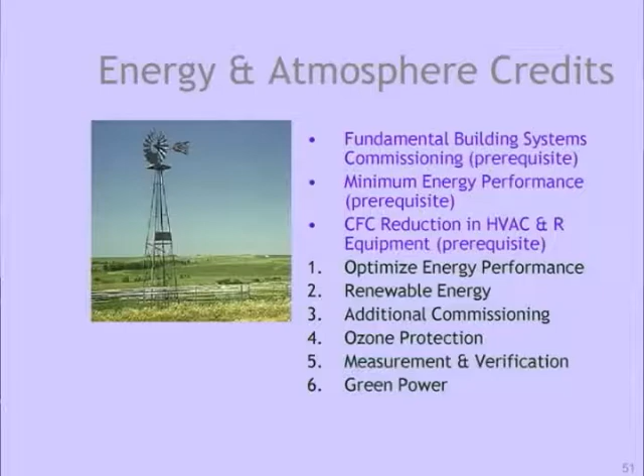So this next category is energy and atmosphere credits. There was a movement in the United States early on when we had high oil costs to do energy conservation, and a lot of those people never gave up the fight to make things more energy efficient. They've rolled some of their efforts into LEED, which is why there's a huge concentration of credits under energy and atmosphere. It's felt that in general our energy production is fossil fuel based, and it is causing climate change in a very negative way throughout the world. We need to do as many things as we can to make our energy go further and reduce emissions from energy production.

So there are 3 different prerequisites within energy and atmosphere, and each one of those prerequisites also has points related to it.

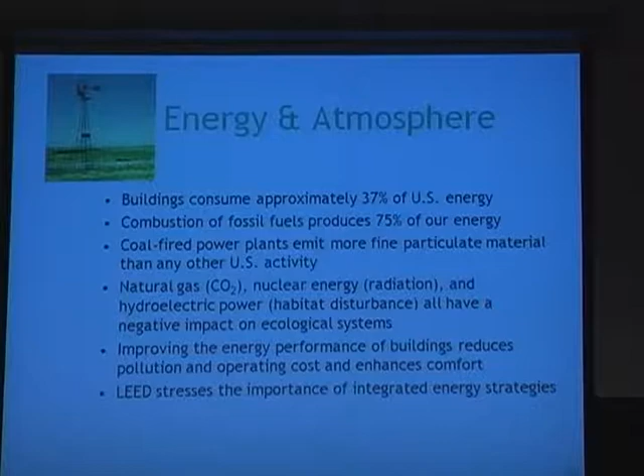We have coal-burning power plants for the most part in the United States, and that's making a whole lot of contamination of our waterways—mercury, asthma, and all kinds of different pollution effects happening. I'm hoping I don't have to explain too much about the nuclear power industry, but we've had a tremendous amount of lobbying by the nuclear power industry throughout the world, trying to build nuclear power plants and saying it's the most efficient and least polluting system there is.

But I challenge you to talk to the people of Japan right now about the pollution effects. We just have not figured out a really safe way to minimize radiation pollution and the effects when things go wrong with nuclear power plants. So I think we need to rethink energy use across the board and come up with better solutions than using all of these methods that are ruining the quality of life for the earth.

So with LEED, we're trying to get you to think in an integrated team approach to thinking about the energy use in a building. The first place to start is to minimize the need for energy. I'll go into that in a minute.

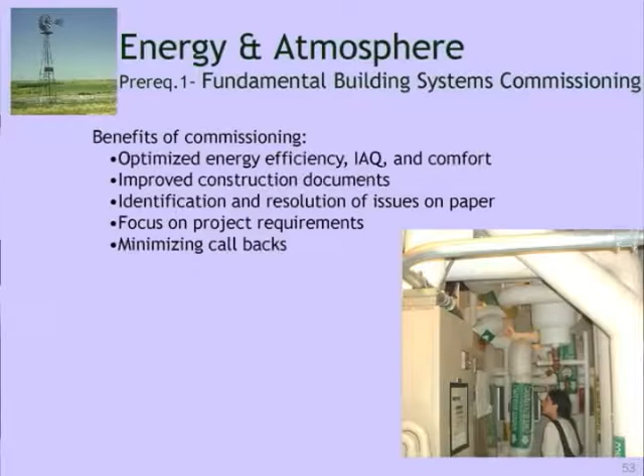The first prerequisite within the energy category has to do with building systems commissioning. I don't know if it's the case in Mexico, but in the United States, a long time ago, we used to have engineers work on projects all the way through design and construction. In our never-ending need to reduce fees and reduce the cost of construction, we kept eliminating little portions of engineers' and architects' work, so they don't always work on all parts of the project. So the engineers would design something quite good, but they weren't always around to see if it got built the way they designed it, or if it functioned the way it was supposed to.

So LEED started using this concept called commissioning. Commissioning is a term that was actually developed by the Navy. When they would build a ship, they wanted to make sure that sailors didn't sink, so they would send the ship out into the ocean to see if it worked, if it floated, and if it could bring people back without drowning them. That was called commissioning. So we do that with buildings—before we put the occupants in them, we want to make sure that all the building systems are built the way they were designed and that they're functioning properly.

Many times we just leave that step out to see if everything's working properly. And we know buildings are going to get commissioned one way or the other—it's either by the occupants putting a piece of tape over their vent, or a newspaper over their window because they're too hot, something like that. It's going to get commissioned. So it might as well be at the beginning of the project before people get into it.

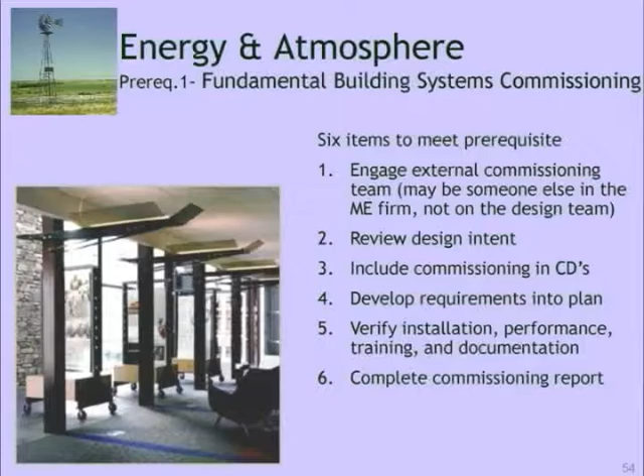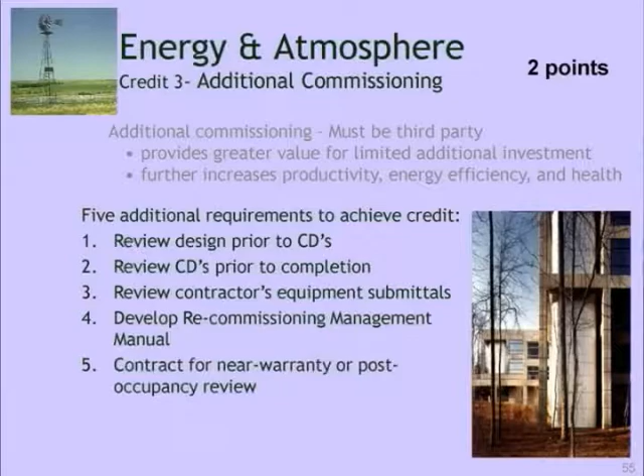So that's a prerequisite. You don't get any points for that, but if you'd like to get points, you can go further and make sure this commissioning agent is involved in the design process so they intimately know what is expected. They not only do the commissioning, but train the people who will work in the building on how the system works. They write a manual, and come back a year later to recommission, making sure it's working the way it was supposed to. So there's additional work for this same person to come back and review.

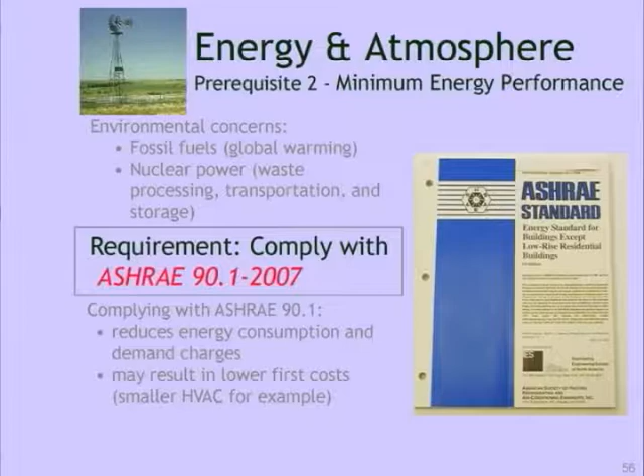The second prerequisite is minimum energy performance. We have this organization in the United States, and it's actually international, because many countries haven't gotten around to having their own professional engineering organizations to create standards for comfort, heating and cooling. For LEED, we rely on this engineering organization called ASHRAE, who developed standards for heating and cooling, and they have a standard for energy performance of a building called ASHRAE 90.1. You must meet the requirements of ASHRAE 90.1 to get the prerequisite.

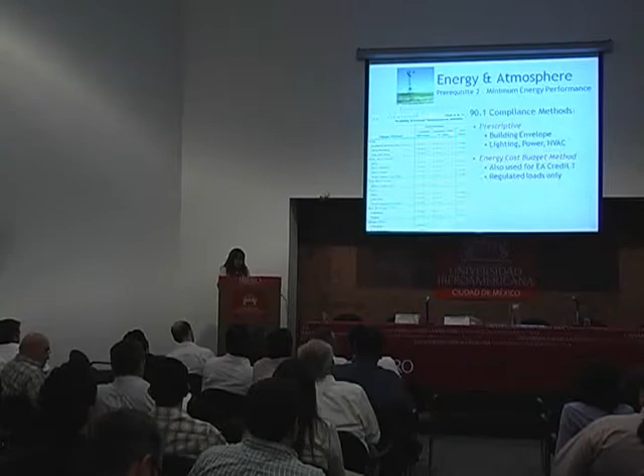There are two different ways to do this. Either follow a checklist of different items you've put in, like how much insulation, the square footage of windows versus walls, what the efficiency of your equipment is, that kind of thing - that's the prescriptive method. And then there's the energy cost budget method, which I'm not going to go into.

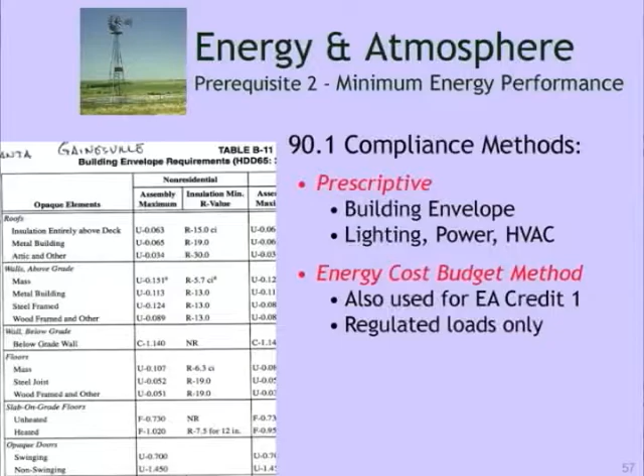There's another concept called energy modeling, where you have software that designs a theoretical building, and then you compare that theoretical building, which follows building code or in this case ASHRAE. Many cities in the United States have building codes that require energy codes. So it's what you can do legally versus what your new design would do, and how much better performing your new design is. There's at least 50 different software programs you can use to help demonstrate compliance to this ASHRAE standard.

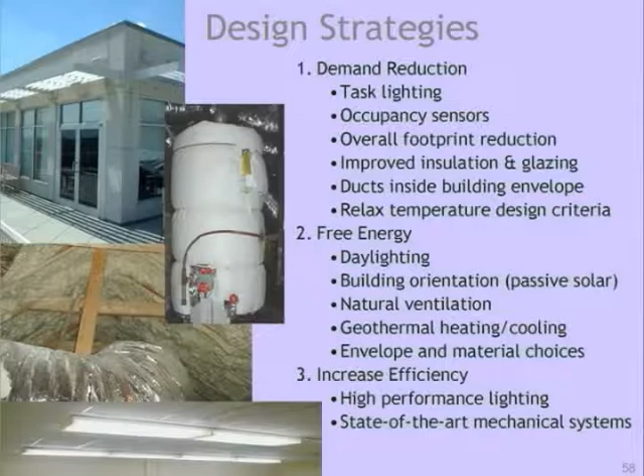What you would want to consider - I think number two should be the first thing you consider - free energy. Can we make this space comfortable? Can you read and do all your functions with natural light instead of having lights on all the time? Because we know people just don't take responsibility to turn lights off even when they don't need them, they just don't take that initiative. So could we get by with natural ventilation?

Here in Mexico City, you've got a pretty temperate place. You have a comfortable situation a lot of the year where you don't really need assistance with heating and cooling, so can you take advantage of that? Can you build a building to shade you in the summer and keep you warm in the winter without mechanical assistance? There are different ways - passive solar design, different ways to orient your building on your site - to make use of free energy.

Then any equipment and any building envelope you have, you'd want to make it so you don't have to demand electricity to make the place function. And if you do have to put equipment in, make it high efficiency equipment. There's a variety of options there - you can either buy the cheapest, right-off-the-shelf thing, or you can look further and find something a lot more efficient. It's up to you, it's out there.

The third prerequisite has to do with the gases used in heating, cooling, and refrigeration devices. When I first started coming here, I know Mexico still allowed CFCs - didn't you recently pass a law that prohibits CFC use? Anybody? No engineers in here? Maybe you didn't, maybe you still allow CFCs - you're one of the few countries in the world that does. But that's unfortunate, because CFCs are known to directly affect the ozone layers of the world.

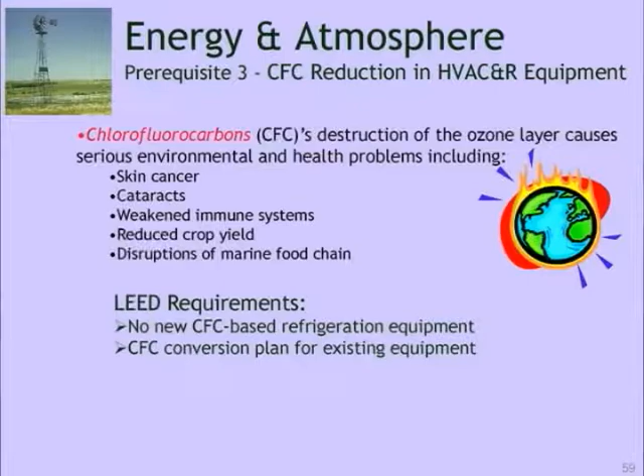So for the prerequisite, to do a LEED project, you cannot have CFCs in refrigeration or cooling, so air conditioning - either in refrigerators or air conditioners. You have to build a building without that, and there are items on the market that help you with that. There's a credit that goes a step further than just meeting that requirement.

CFCs are chlorofluorocarbons and HCFCs are hydrochlorofluorocarbons. All of these gases are used for propellants and keeping things cool. There are a number of different propellants now that can replace these ozone depleting ones. LEED prohibits the use of CFCs and gives you points for avoiding HCFCs.

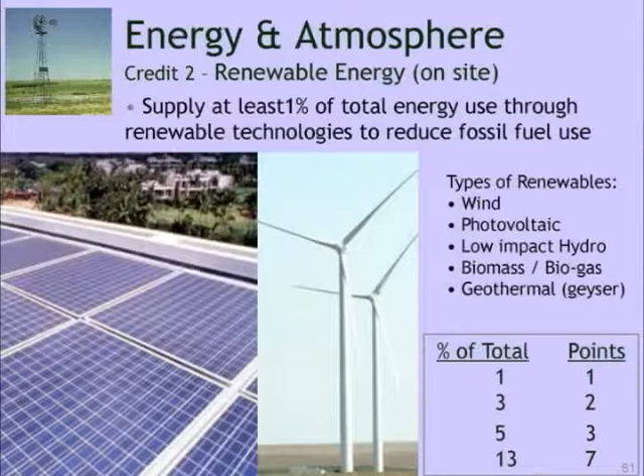These wind turbines in the middle are probably not so on-site friendly. They need to be a little smaller to be useful, but I know there are certain portions of Mexico that are wind tunnels. You can look at wind maps and know where wind might be likely, and that's where you'd use on-site wind generation.

If you don't have that, I know Mexico has plenty of sun, so another option might be photovoltaics or solar panels. Another place, if you have high mountain streams with enough volume, you might use small turbine hydroelectricity, running your building off stream power without interfering with the natural flow of the stream. I saw that in Ireland, a fairly flat country, but they had places where streams coming off mountains would power small villages and farms.

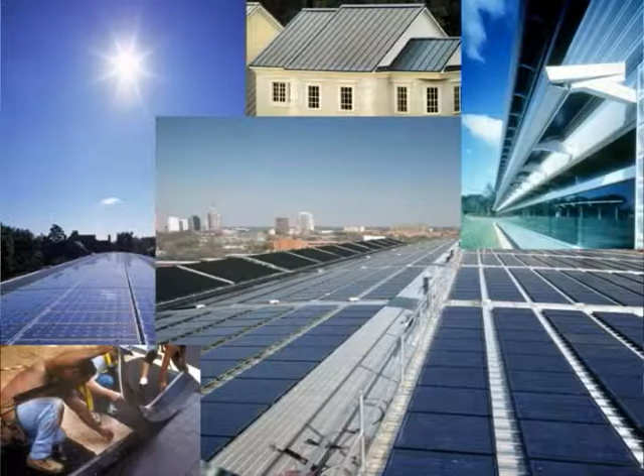In Europe, it's becoming very common to see building integrated photovoltaics, where they're part of the building skin or roof system, fully integrated instead of just applied to the roof or the ground off the building.

Measurement and verification is in here because a lot of times we build things and then don't pay attention to whether they're really functioning as designed five years down the road. This involves building in meters or computers within your building to track energy use over time and indicate if something's going wrong.

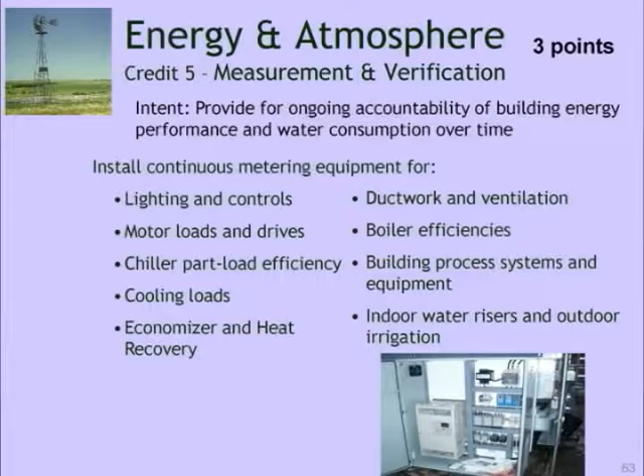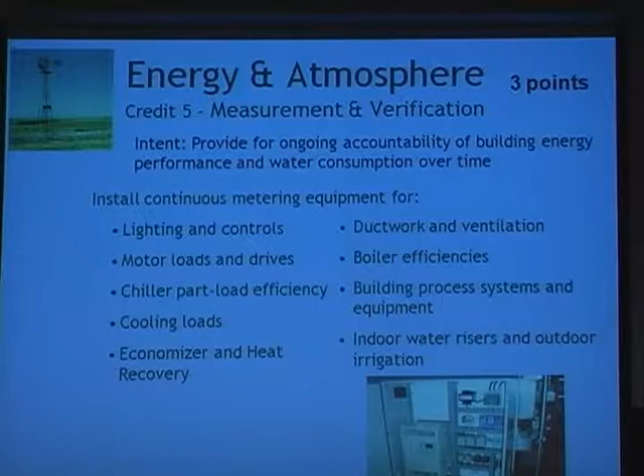So if you planned a certain amount of watts for your lighting, and two years down the road you're suddenly using all sorts of electricity for lighting, this measurement and verification protocol will help you identify what might be happening and what corrective measures to take. Some of this equipment can be pretty costly for a small building, but for a large building it can really help you save money by identifying where electricity is being used and where it's being wasted.

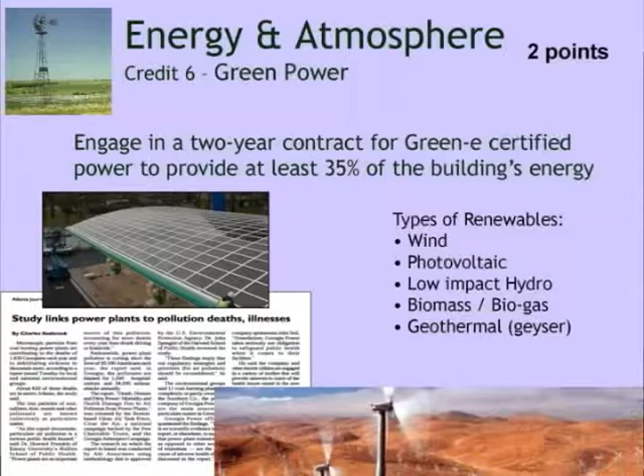So you no longer have to go somewhere else in the world to purchase green power. You can either purchase power to run your building, or buy something called a renewable energy credit, meaning you're not using it directly in your building, but offsetting your electricity by helping promote a wind generation plant somewhere else. It's kind of like carbon trading. There are two ways to get this credit: directly buying power from a renewable energy source, or buying the renewable energy credit.

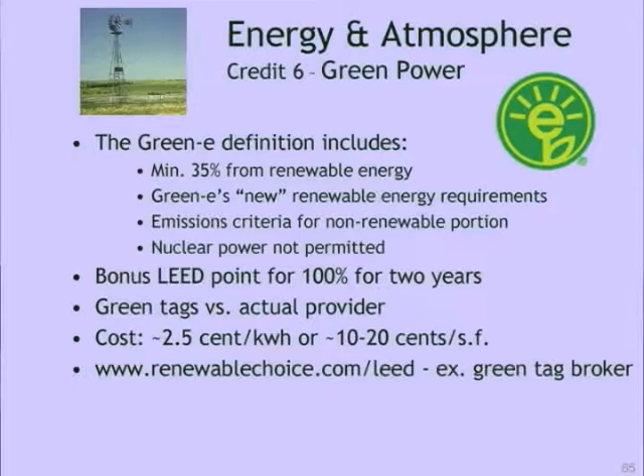Way too much information, but I think renewablechoice.com will help you find a broker, even in Mexico, if you don't already know of brokers for green power. So with green power, there are two options: you either supply your own power on-site, or you offset that power and get it from the grid or purchase the renewable energy credit.

So with these energy and atmosphere credits, there were a whopping 35 points you could get. There's a lot more emphasis here than, say, water or sites.

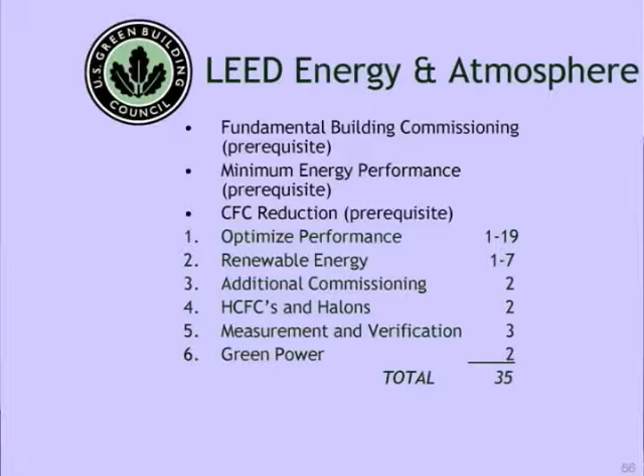The next category is materials and resources. This is what a lot of architects focus on because it's what they do, specifying materials. There are points here about minimizing waste in the manufacture of materials, making wise material choices, and using materials that don't use up a lot of embodied energy. Are you familiar with that term?

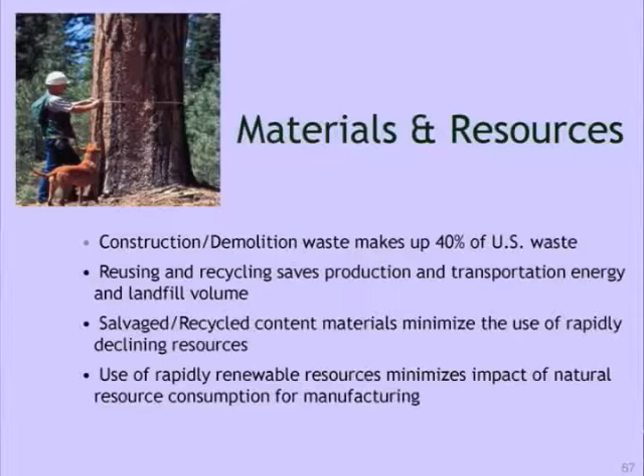It's not just the energy that it takes to make something function, it's all the energy and natural resources it takes to produce and use the material over time. So we're trying to look at embodied energy in materials and reduce that amount. In future versions of LEED, there's going to be a much stronger concentration on environmental footprint or embodied energy of material use.

We're working with ISO, the International Standards Organization, to come up with embodied energy standards and material standards in general. It's been quite a long road to try to get this international standard in place.

Everyone has their own measurement technique. Do we measure how far the workers have to drive to the mine, and how far the mine is from the factory? Nobody knows exactly where to measure from or where to start in measuring environmental responsibility. So we're coming up with international standards where we can all agree on the stopping points and measuring points for environmental responsibility of material production. So stay tuned, that's going to be the next new thing in LEED.

Now, you have a legendary landfill here in Mexico City. I understand it's huge. At some point I'd like to go see it someday. But anyway...

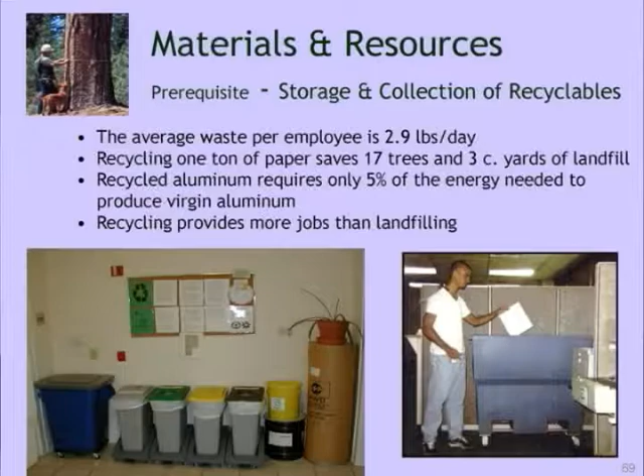We're trying to encourage people to recycle within their business and to sort their materials in their business, so it makes it easier to separate and send those off to places that can reuse them.

I understand there's actually a neighborhood here in Mexico City that started a recycling system, and within 4 days they had diverted 4 tons of garbage from the landfill. That's pretty significant for one little neighborhood, and they're trying to make that happen all over Mexico City now.

But it's going to take source separation, so you have, I think they do it here in this university, paper, cardboard, plastic, aluminum, that kind of thing. So this is a prerequisite with LEED, that you have to make this effort to recycle within your site. I know this used to be a difficult thing for buildings in Mexico City, but it's not anymore. I don't think you have any excuses anymore. You can do this now.

So this will help with the waste management issue that we all face.

The first credit is building reuse. And in my mind, the greenest building is one we don't build. Let's reuse what we have. I'm not sure what adaptive reuse we can make of pyramids, but somebody's probably thought of it before. We can figure out a way to reuse this.

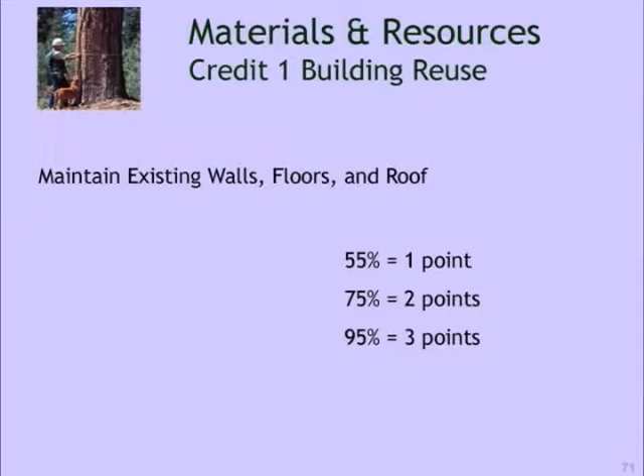The way we measure this is by physically measuring the walls, the roof, and the floor. So that means you don't have to reuse all of the building. You can maybe knock out one of the walls and add on to it or something, but reuse as much of the existing building as possible.

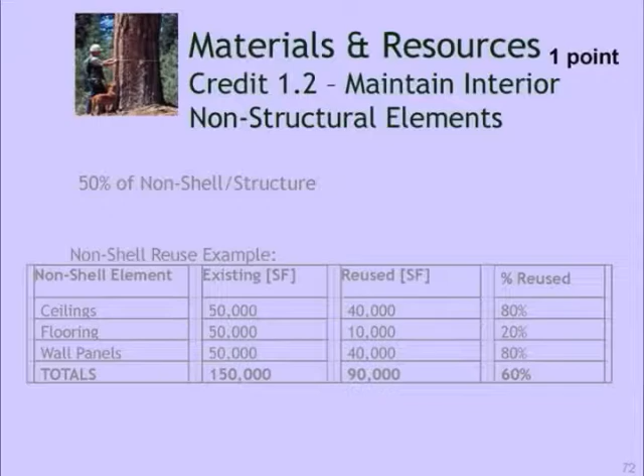There's a second point for reusing interior sections of a building. So maybe you're using the envelope of a building and not using most of it inside, but if you take some of the partition walls, maybe there was an acoustical ceiling you could use, or some of the flooring you can reuse, that can help you get this extra point for maintaining interior non-structural elements.

During construction, we know a lot of construction waste goes to the landfill. So again, we're starting to look for ways to divert materials, to reuse construction materials and use them more mindfully, even in other building projects or for someone else's use.

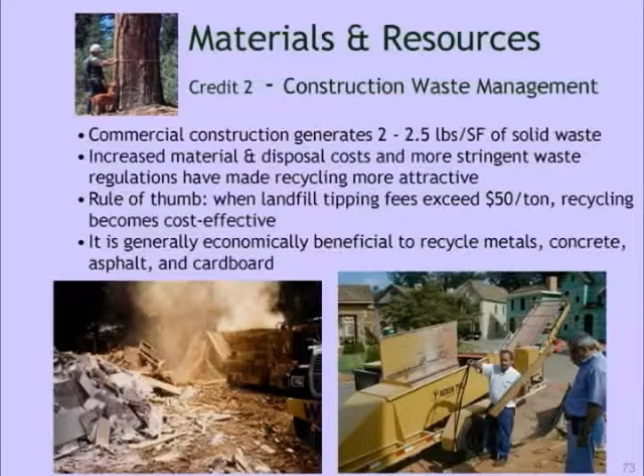For instance, on one of my projects we were building a new airport, and we took up all of the concrete and ground it back up and put it back down. I'll back up a little bit. We had to pull up the concrete because there was toxic waste buried under it, so we had to get to the toxic waste, pull it up, remediate it, and then put the concrete back down, which was something we hadn't planned. We thought, oh good, we have all this concrete, we can land planes on it. But anyway, we ground up all of that concrete.

We used all of that again in a new concrete mix. So going the extra mile to think up ways to reuse the materials is going to help with your landfill size, as well as help with your cost to haul away materials. Maybe you can find a home for something really close by. The metals, some people might want to come and claim. Some people might want to grind up the concrete and take the cardboard away. There are markets for these things.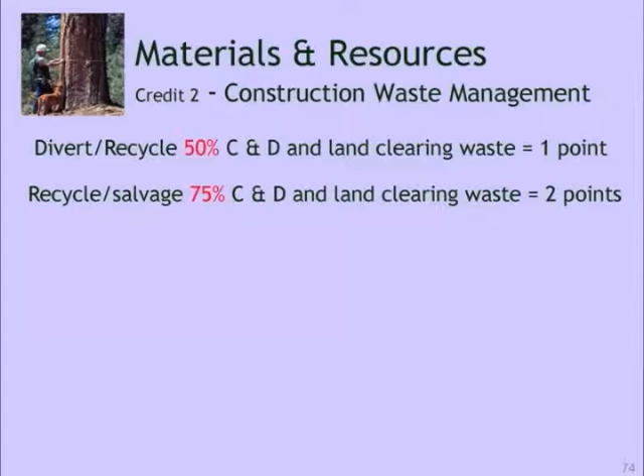So you get up to 2 points for construction waste management, for diverting up to 75% of your materials. If you divert more, you can get a 3rd point. By many of these credits, if you exceed the thresholds, you get an exemplary performance credit. So you could get an exemplary performance credit for this.

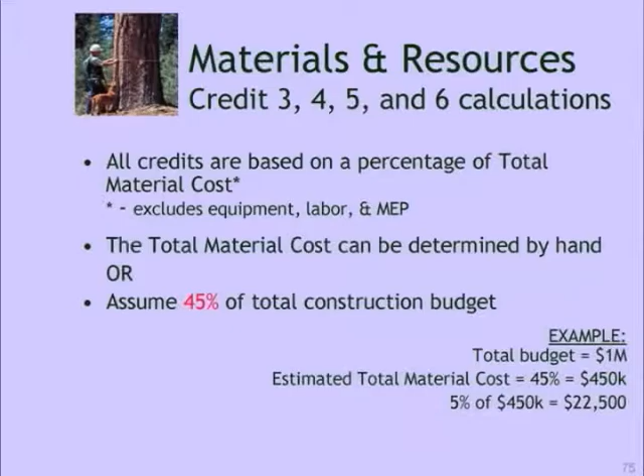These materials credits, it was really hard. This was many, many meetings worth of trying to figure out how responsible a building is with materials. And the only way we could figure it out, because it was difficult to compare one building's materials to another building's materials and say which one was better. One building might be huge and the other might be little, and what if the little building used some really horrible materials?

So what we decided was to measure this by percent of the cost of the materials. So the total cost for the building materials, this doesn't include labor. We have to get that figure, which has been difficult, I gotta say, to get the general contractor to give us a just materials figure, because many contractors, when they're bidding on, say, the wall system, they bid on everything - the paint, the wall, the labor all together - and to try to get them to break that out has been a bit of a challenge with LEED.

But we've been able to do it on projects to try to get this more fair way of measuring the responsibility of materials. So these next several credits are a monetary achievement. So the more of your construction budget that has these attributes, the better.

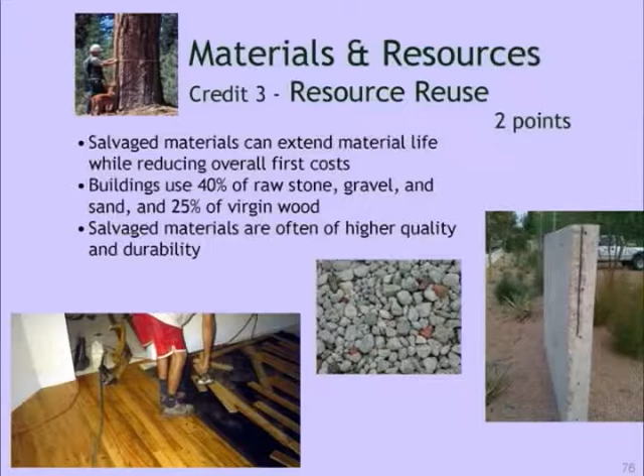So we got them to cut up the parking lot into some squares. We tilted those up and put them, instead of that we use those for these walls. A friend of mine calls this urbanite - so it's urban refuse being used again and stretching out its life. The picture in the middle is ground up concrete and ground up aggregate to be used back into, or you can just reuse it as gravel on your site. I don't need to tell you more about that.

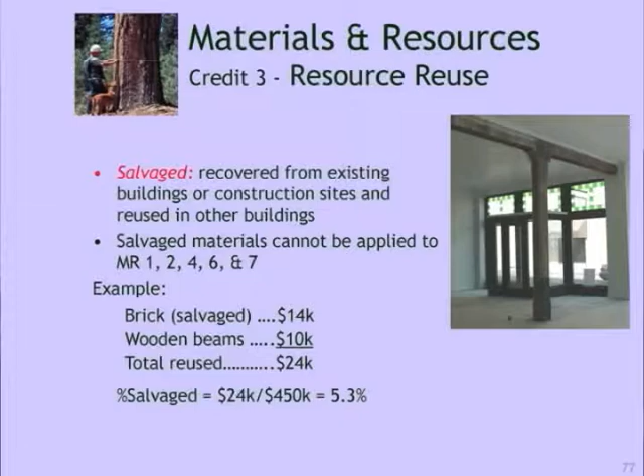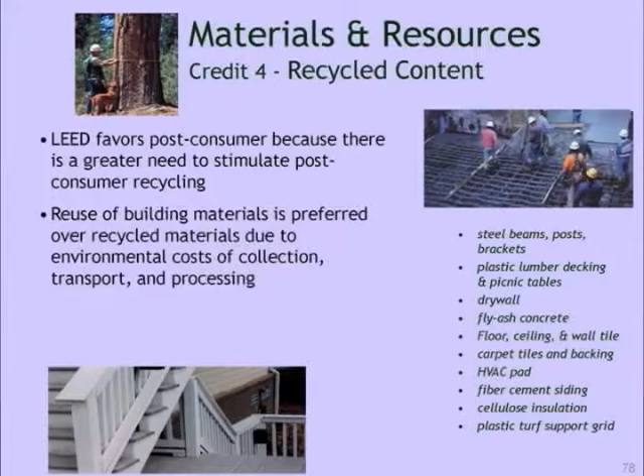One of the simplest things to do now is to specify materials with recycled content. When I was first starting in this industry, I would call up people and ask if there was anything recycled in their material. I specifically remember calling the Armstrong ceiling tile representative and saying, is there anything recycled in your material? Because I had read that they grind up newspaper and put that in this, and he goes, no ma'am, we don't have any of that bad stuff in our material - because he didn't want to admit that they did this.

And the next year, when he realized that people were going, well, that's really too bad, because I'm really looking for materials that have that - all of a sudden, Armstrong started marketing the fact that they have 90% recycled content in their materials, and they're very proud of it, and other people started catching on. And so it's actually difficult to find materials that don't have some component of recycled content in their product. And it doesn't have to be 100%, it can just be a portion.

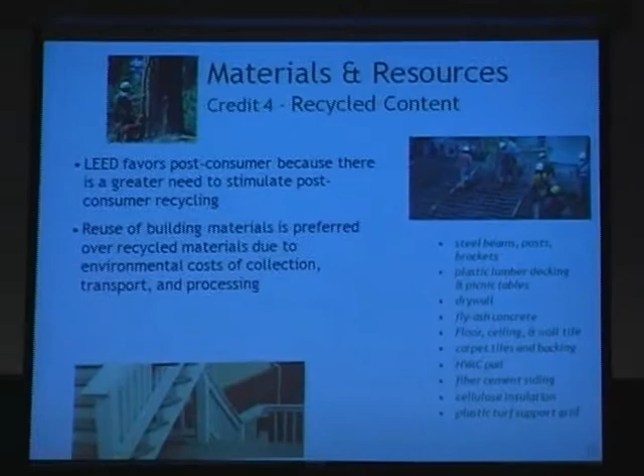For recycled content, we have two different kinds. We have recycled content before it goes out to consumers, so before it gets off into the world - it goes from one industry to another industry. That's called pre-consumer recycled content. And then we have the recycled content that is called post-consumer recycled content. That's like one of the plastic bottles that gets melted down and made into carpet - so that's called post-consumer. And we value in LEED post-consumer recycled content more than pre-consumer recycled content, because it's not traveling as far, it doesn't have as many uses. There's some intellectual discussions about that, believe me.

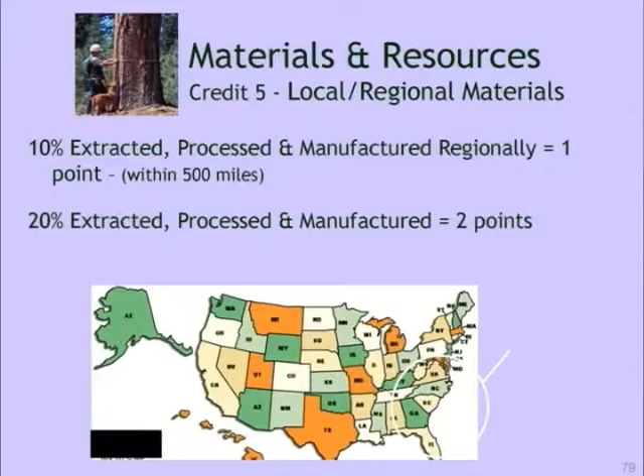Okay, there's a couple of points for buying local. Trying to stimulate your local economy is really important - this is really important to your nation, to try to keep people working here and making things useful for you to use. And so we're asking you in LEED to specify things that are manufactured - in our case, we're saying 500 miles away from your site. So things that are extracted, meaning mined or harvested, like trees or something like that, harvested or mined and manufactured within 500 miles of your project. And I know Mexico City has a lot of manufacturing. You can try this.

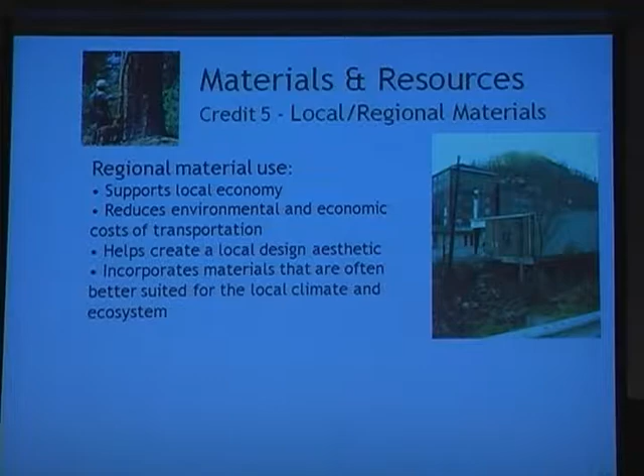It also helps with transportation cost. There are so many items like stone that are quarried in Asia, then shipped to Italy to be cut, and then brought here to be used, where you might have some wonderful stone here in Mexico that didn't have to travel all the way around the world to get here.

But the problem is they used slave labor to make that, and they're not employing people locally. It also represents the amount of subsidies we put on the international transportation industry. Governments pay a lot in subsidies to the shipping industry, and we'd like that to stop because it's wasting a lot of energy.

Another thing that isn't used enough in LEED is rapidly renewable materials. This means using materials that are grown or harvested within a 10-year cycle, so things like wool carpet, or Raul de Villafranca's specialty bamboo. You could use bamboo in construction. He uses bamboo for structure, which is an unusual thing and a really wonderful material, isn't it?

It's beautiful too. Someday you really need to give me a slide of one of your restaurants or something, because they're really beautiful. I'd like to have that instead of this bamboo forest.

I'm really not an advocate of using bamboo flooring that's made in China, because it's got its own transportation issues. If there's something you can harvest here and use it here, this is really important.

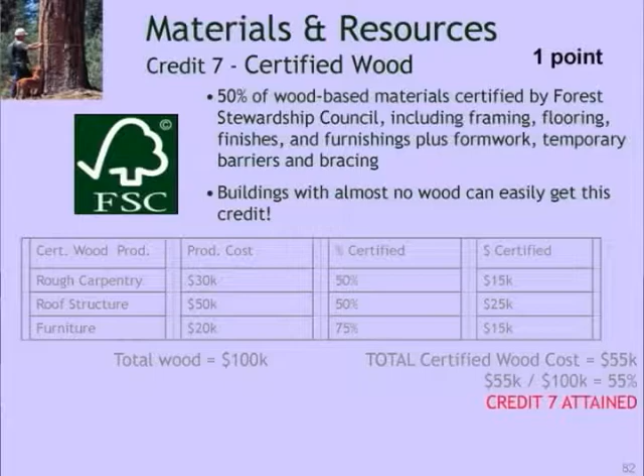For instance, a clear cutting situation degrades water, causes pollution. There's a lot of problems, it ruins habitat. FSC is a whole system to try to protect forests and to try to provide us with the wood we want. So FSC is what we use, even though there are a number of other options out there. This one we feel has the most integrity of the systems. So there are 14 possible points within the materials category.

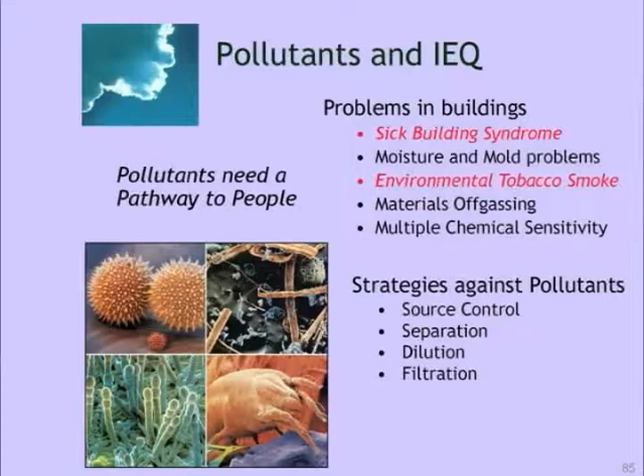Pollutants and indoor environmental quality. This isn't just indoor environmental air quality, it's looking at some of the bigger pictures of the indoor environment, looking at worker productivity, because the more comfortable and healthy you make an interior, the more people want to be there and work productively, according to studies. I can't tell you exactly the percentages, and I have a feeling this might have to do with culture as well, but we're trying to make a healthier atmosphere to make workers happier in their building.

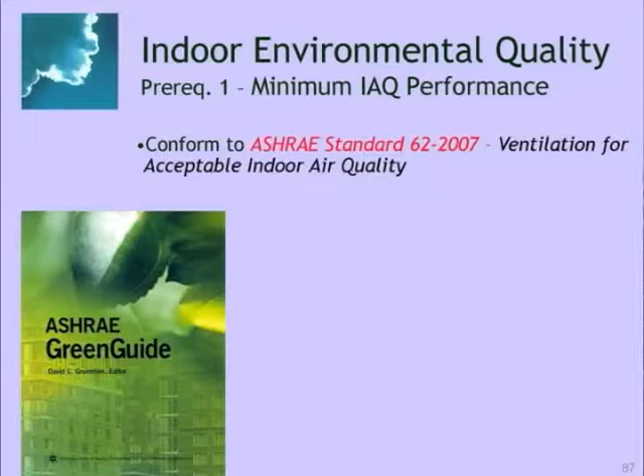So there are two different prerequisites here. The first one has to do with fresh air, getting oxygen into your building. Even if you have a naturally ventilated building, you will need to demonstrate that you don't have stagnant air in the room, that you've done something to cause convection to give an air exchange, which is a good idea, and it also helps keep the temperature moderated. So having more oxygen in the room means that people can think better, think clearer, and they feel better.

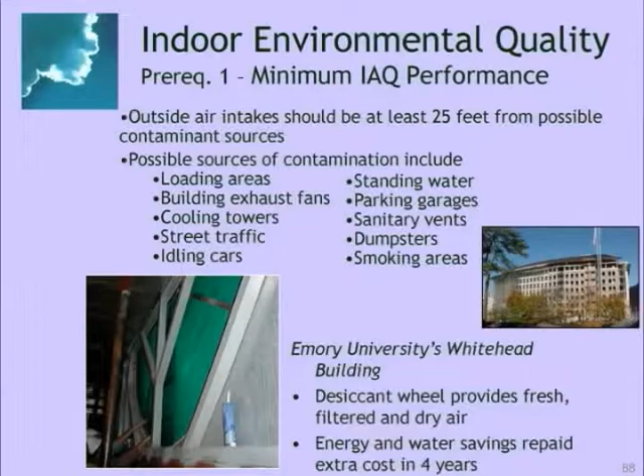The first prerequisite has to do with making sure that there's enough oxygen, making sure that there are measures taken within the building to minimize pollution coming in, so that you've taken fresh air and either naturally treated it, by convection, or filtered it in some way to bring in fresh air and oxygen, delivering clean air to people. There are a number of different ways to do that.

Sometimes it's a real challenge in a very high humidity place. In this picture here, it's kind of hard to see what it is, but you can see there are hands down there at the bottom of the picture.

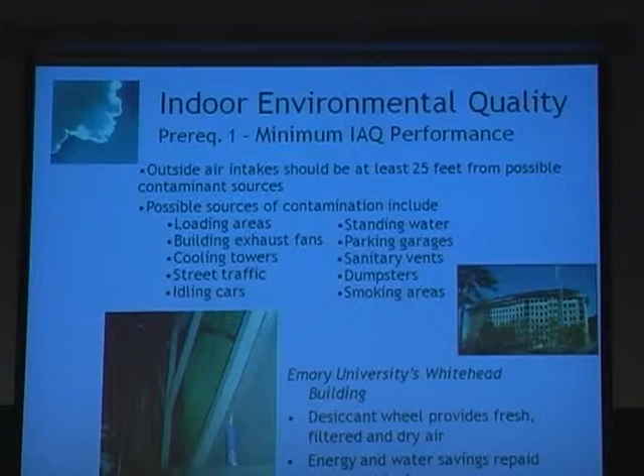That's a giant desiccant wheel, and that means that the air is pulled through that big wheel, and it's wrung out - it wrings out the moisture in it, so it dries out the air, and it takes that moisture and does other things with it. It can pre-treat incoming air and all kinds of different things. It also moderates the moisture in the air, and it helps with energy efficiency, because the drier the air, the more comfortable people are.

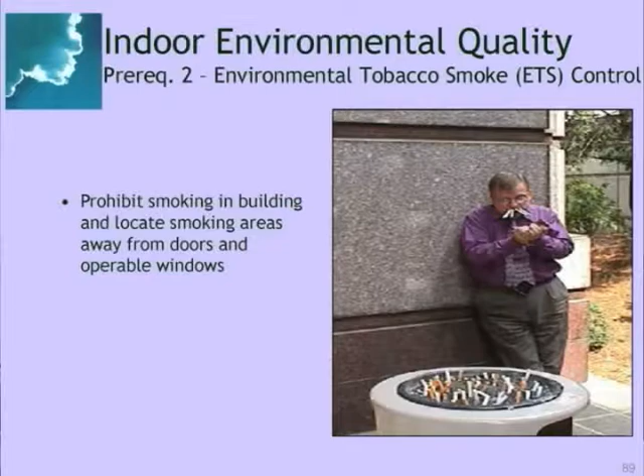The second prerequisite is to have no smoking in the building. I know this used to be a challenge in Mexico City, but I gather a couple of years ago you had a new law passed about no smoking in businesses, right? So this is a good thing. With LEED, they ask you to make a provision for all those people who do need to smoke, though. You need to have some place away from the doors and windows of the building for smokers to smoke safely without that smoke coming into the building. Or there is a new provision that says no smoking anywhere on the campus - they'll allow that too. But they knew there are going to be smokers, so they wanted to make a provision for them.

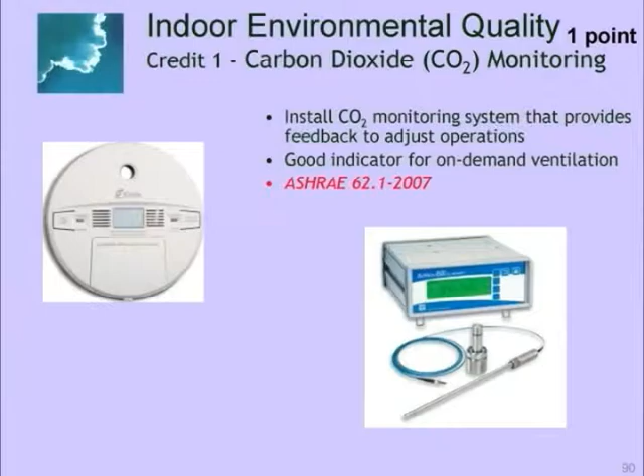Okay, the first credit is about carbon dioxide monitoring. It's just known that the more people you have in a space, the more we're breathing, and the more we're breathing, the more we create carbon dioxide. And that starts affecting our brain. If we get too much, we can't think very clearly, and we all get sleepy. I notice a lot of you sleepy right now, and I know it has nothing to do with my presentation - it's got to have something to do with the carbon dioxide in this space. I don't know that, but I'm hoping. Anyway, this is having some sort of measuring devices to measure the carbon dioxide. And if it gets too high, like it often does in an auditorium, it kicks in some sort of fresh air device, and that fresh air will be blown into the space.

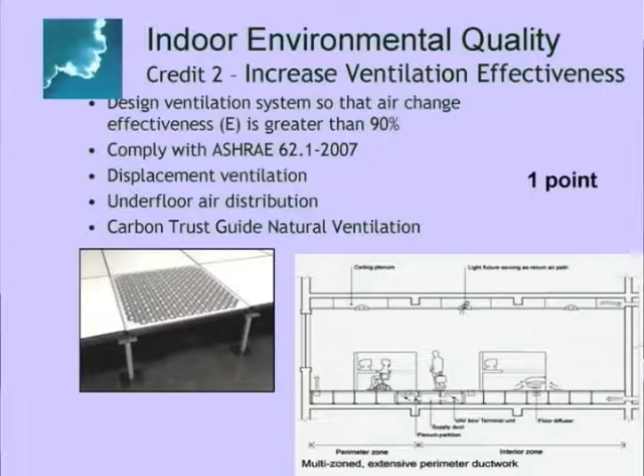Credit 2, increase ventilation effectiveness. There are some fancy ways to deal with this and some not fancy ways. What this means is, in this room, most all of us are breathing down here. So it's kind of weird, or a waste of energy, to condition the area up there or even bring oxygen up there - we don't really need it. We need it down here where we are and where we're breathing. So there's this thing called displacement ventilation, where you introduce the air here and you don't care about what happens up there. You're not trying to move this massive volume of air around. This not only helps with oxygen and breathing, it also helps with energy efficiency.

A couple different ways to do that. This one over here is the raised floor that a lot of people think is really sexy. It can be kind of expensive to do and not necessary. It could be a good idea depending on your building.

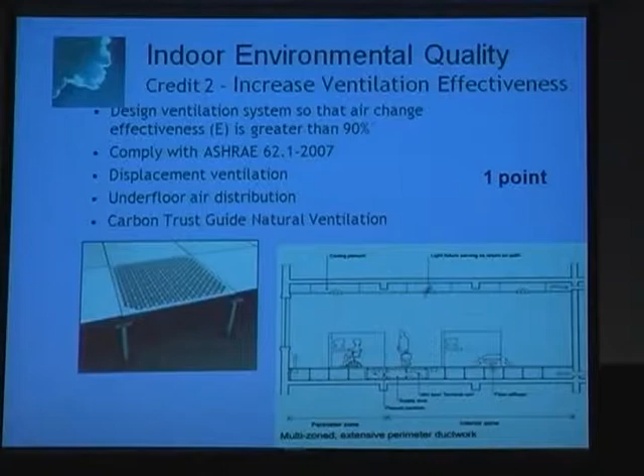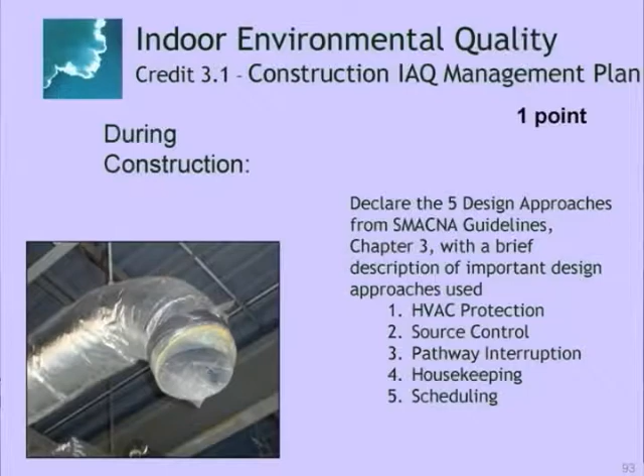Okay, during construction, the construction workers can do irreparable harm or eternal good, depending on the air quality of the building, depending on what they do while it's being constructed. If they're smoking a lot of cigarettes during construction, what does that do? You can't get rid of that - it permeates the walls, and it's going to affect the indoor air quality. During construction, there is a guideline to keep the place clean, to make sure that dust doesn't get into the ventilation system, that materials are covered so they don't get wet and mold during construction, or that they don't get really dusty. I mean, if you've ever been around gypsum board when they're cutting it - it's this fine white dust that gets into absolutely everything. That dust will continue to get out into the breathing zone of people if you don't take care of it during construction. So we try to keep the place clean.

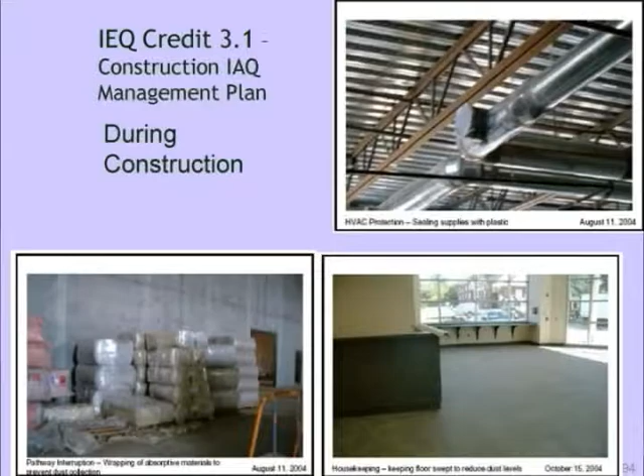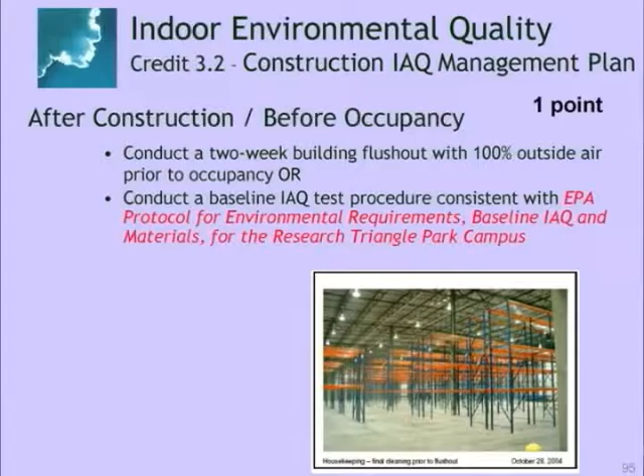That's all you're asking. It takes a bit of education to show people how to keep things covered, how to keep things closed off until needed, and also if you're going to run the ventilation system, that you keep things filtered before you run it. There is a point for indoor air quality before the people move in. They want to make sure that there's actually clean air for them.

This is a kind of a weird credit in my mind, because I feel that my projects always specify materials that aren't going to be pollutant in the long run anyway. But this is saying, well, we'll give you a point if you make sure that there's fresh air run through - it should be filtered here - run through your building first, or that you go through your building and test for pollutants, indoor air quality issues. So you want to test for formaldehyde, volatile organic compounds with these different testing devices. So you can either flush out the building or test for indoor air quality before the occupants get in. Either one, and you get a point. It's just a safeguard.

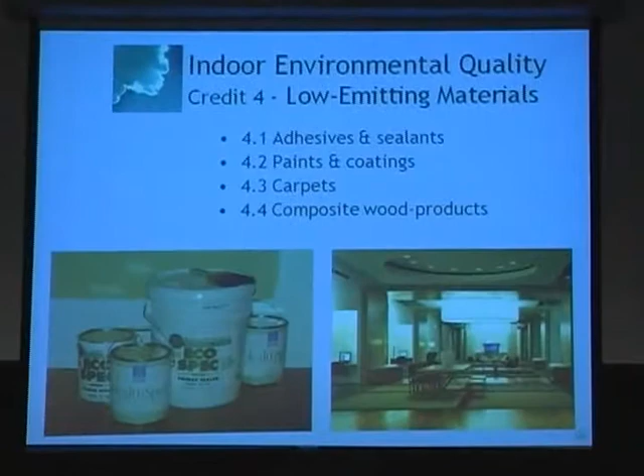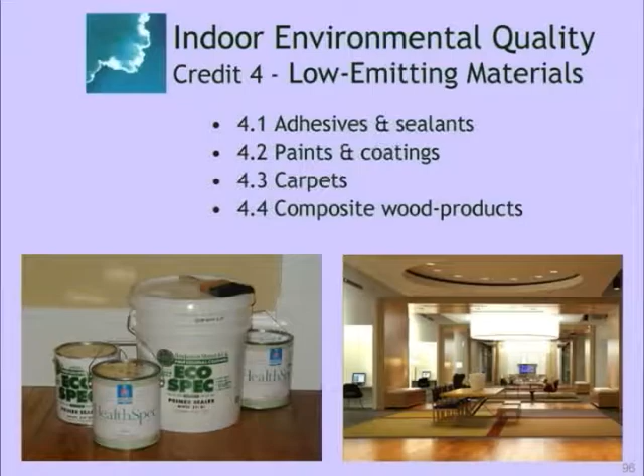There are 4 points for low-emitting materials. This used to be a hard thing to do. There used to be a real problem in finding materials that weren't going to be polluting the indoor air quality later. A lot of materials had solvents in them to make them dry faster when used.

Adhesives and sealants had solvents that were there for the purpose of making them dry quickly so they weren't tacky later on. Paints and coatings had things like mildewcides in them to allow them to stay on the shelf a long time. The first generation of these low-emitting materials were sort of inferior. They didn't perform very well, and painters would complain that they didn't glide on as easily and that kind of thing.

But I think a lot of these hurdles have been overcome, and a lot of the major manufacturers know how to manufacture things that are not going to emit harmful chemicals to the occupants. I met with a woman here at lunch who's an architect and LEED consultant here in Mexico City, and she said she's worked with a number of paint manufacturers here to make no-VOC paints in wonderful colors, and I know that they're available here.

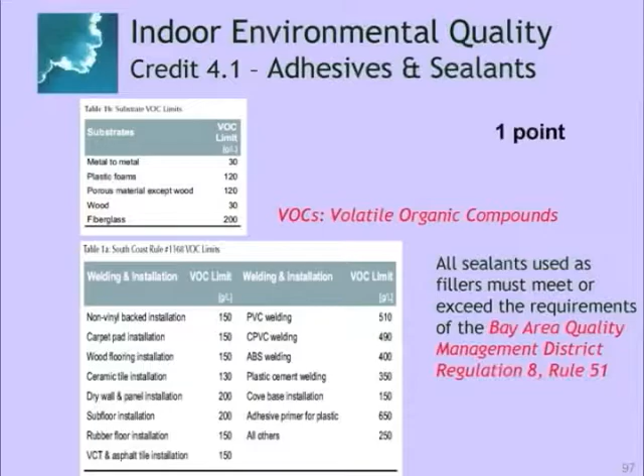We use this really esoteric standard for these because the only place in the world that bothered to come up with standards for volatile organic compounds is the state of California. They did that because they were having so many fines to pay for air pollution. In the United States, we actually fine cities for polluting, and they were having to pay so many fines that they decided it can't just be cars, it's got to be other things emitting compounds into the air causing pollution.

So they looked at everything—mechanical shops, paint and body shops, dry cleaners, and just every sort of process, and they came up with these acceptable thresholds. So now if you have a product and you want to sell it in California, it has to comply with this. So everybody who manufactures stuff wants to sell stuff in California, so they all go by this rule. These are the California thresholds.

We also have something for paints and coatings called the Green Seal Standard, which again means many chemical compounds can't be present, and it can't emit high volatile organic compounds. For interior paints and coatings, you can get an innovation credit for also choosing low volatile organic compounds on your exterior coatings and adhesives.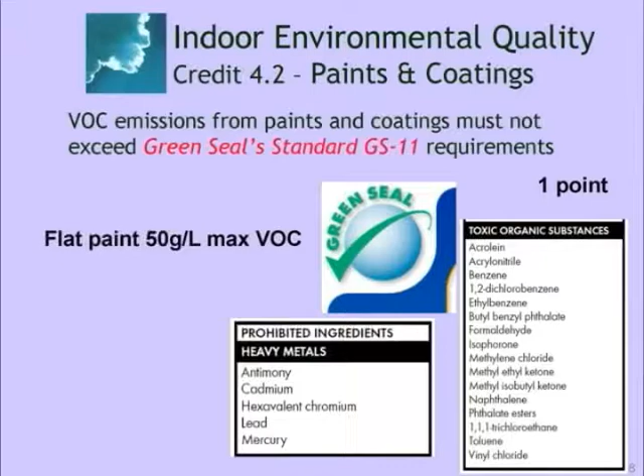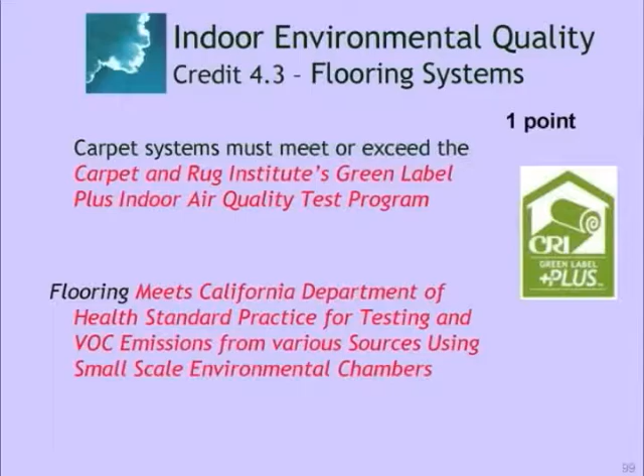There's a system called the Carpet and Rug Institute, which is, in my mind, kind of the fox guarding the hen house. This is an industry standard—the carpet industry coming up with their own standard because they didn't want anybody else telling them what standard they could have. So in my mind, it's still kind of a high tolerance. I think it should be more strict than what they allow, but they really did start paying attention to how many chemicals the carpet industry could emit.

I didn't realize that sometime in the 1980s, internationally, carpets stopped being woven and they started being glued. That's where we started running into problems with those glues and those fibers that they started using. So we got rid of all the mills that would weave things, and we started sticking them together.

With LEED now, we have another system for flooring. So say you don't want to put carpet down, which lots of my buildings don't. There's another emissions test for any of your hard surfaces. Things like ceramic tile are exempt because we feel that ceramic tiles are going to be fine no matter what. There's a number of things that are exempt.

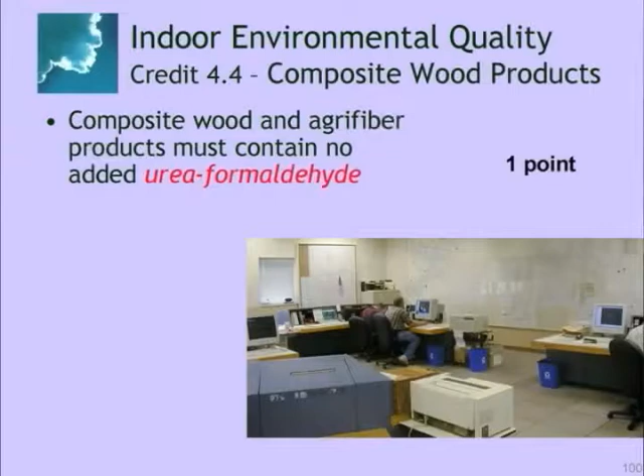Composite wood products—we know that a lot of materials are made by taking sawdust and small dimension lumber and gluing them together. We used to use a lot of urea formaldehyde for this, which is a carcinogenic. LEED is trying to steer you away from that and use a composite fiber that uses other kinds of glue instead of urea formaldehyde. So we're looking for any kind of composite material that has a different kind of glue.

Indoor chemical and pollutant source control starts with recognizing that we bring a lot of pollutants into a building on our shoes. So the first thing is to have some sort of method to clean our shoes off before we get into the building.

We also want to make sure that chemical mixing areas, like a janitor's closet or other chemical storage, don't introduce those chemicals to the workers or occupants of the building. These need their own separate ventilation system so that air doesn't get out to the rest of the building, which helps avoid mold. The third requirement is a higher grade filtration system so you're filtering out impurities in the air.

Controllability of systems goes back to worker productivity. Not everybody has the same needs. I'm 57 years old and I have different lighting needs than someone who works for me who's 20 years old. As your body ages you have different requirements, and two different people have different requirements for both lighting and comfort.

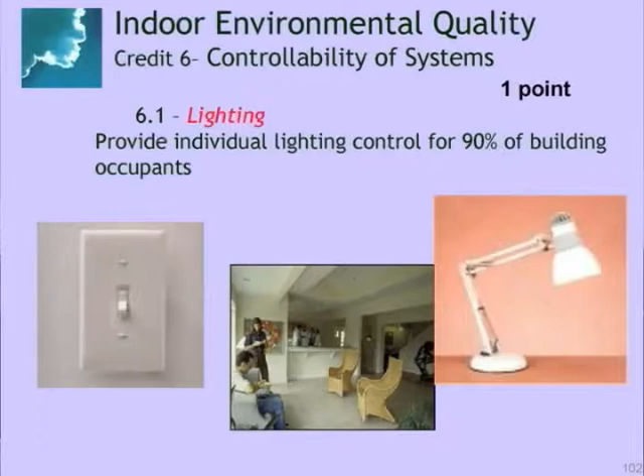There's also a credit where I feel there really is a cultural bias. In the United States, ASHRAE has determined that Americans are comfortable in a really finite range of temperatures, and I think the rest of the world has a much broader comfort zone for temperature. But again, this is a credit for designing for the comfort of the occupants.

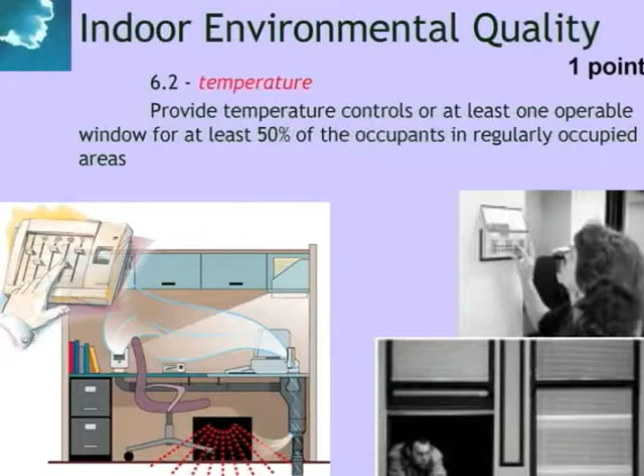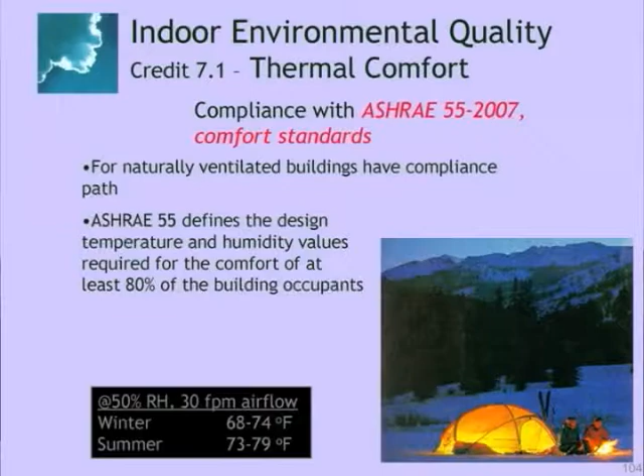This is another ASHRAE standard for comfort, ASHRAE 55, and it's a pretty narrow range that it allows for. For these credits, you have to meet this thermal comfort standard, so you have to zone and prove that you're designing for that particular threshold. And then there's a credit for doing an occupant survey on their thermal comfort.

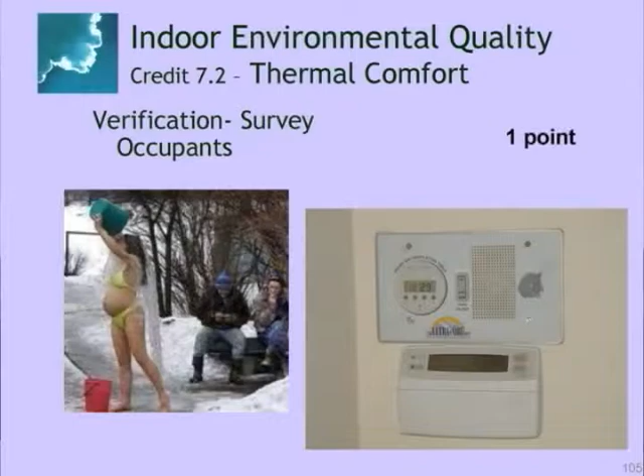How many of you have worked in a building where two people side by side in the same temperature, one is hot and one is cold? It happens all the time in offices—people are always saying 'I'm cold,' 'I'm hot,' and there's wasted time because nobody can adjust their own temperature. So LEED gives you a point for having occupants be able to adjust their own temperature.

This has shown to be huge for worker productivity. It also, believe it or not, helps with energy consumption, because people have a pretty broad range of comfort, and one person makes up for the other person.

Another thing we as humans all like is to work in natural light. Lots of us don't like artificial light, and we like to be able to control our light, but we also really enjoy working in natural daylight.

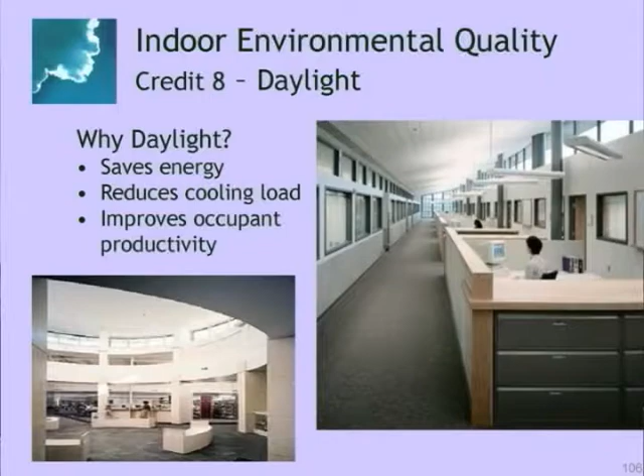There are ways to plan your building to maximize your light and either maximize or minimize the heat gain, depending on where you place your windows, monitors, or clerestories. That way you can really cut down on electricity use and make people enjoy their space better. There are a number of different things called monitors and clerestories.

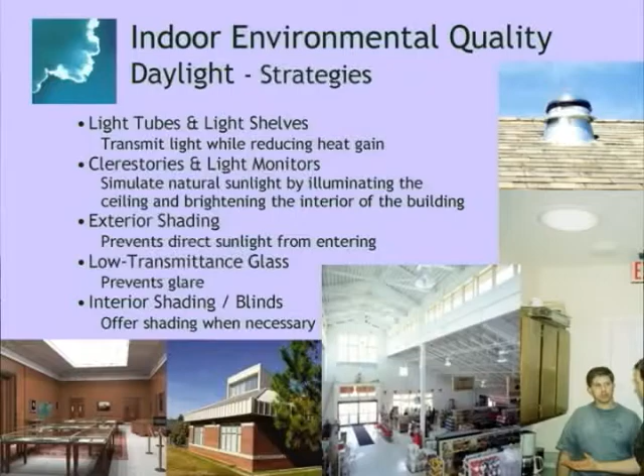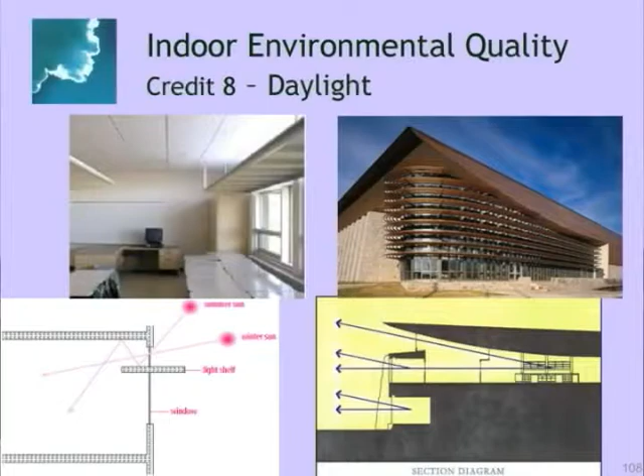You need to make sure people don't have glare—there are ways to prevent that too, so it's not interfering with them, like no glare on computer screens. I have a lot of daylight slides because it's another one of my passions. This is about designing so natural light pops back into the space, while also shading the windows so you don't get heat gain. It's pretty simple.

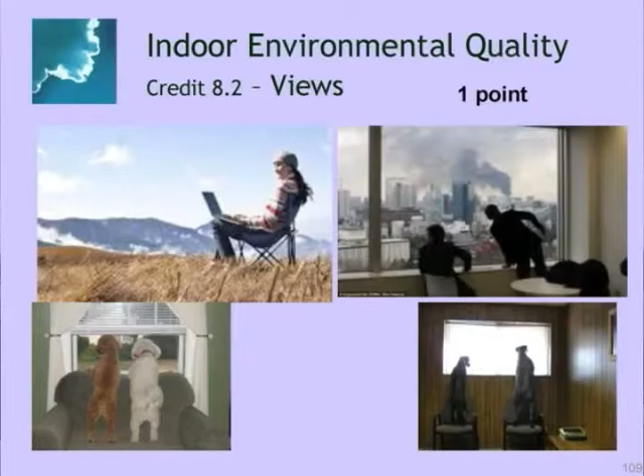We humans, as well as other animals, like to see what's going on outside. We really enjoy contact with nature, as well as just curiosity—we want to know, is it raining, is there a building on fire, whatever—we all like to look outside. This also helps with stress level; being able to gaze outside from time to time really helps people de-stress when working on a task. So building in views so people can see out—you can still have interior offices.